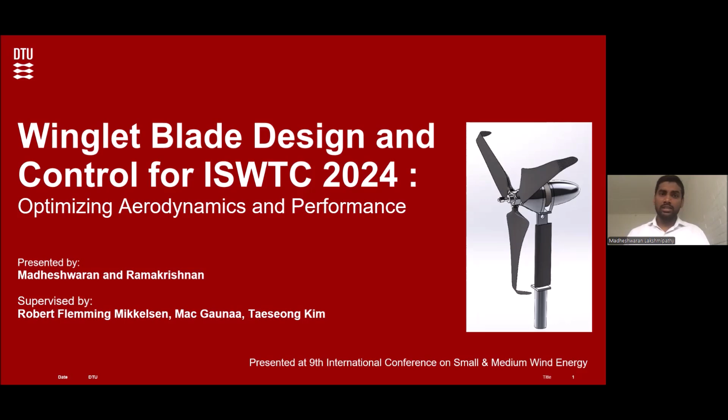Hi everyone. We are here to demonstrate our research, which was focused on winglet blade design and control for ISWTC, the International Small Wind Turbine Competition, which occurred this year, focusing on optimizing aerodynamics and performance. We are two students representing the whole team of eight students. This is also a course and a club, supervised by Supervisor Robert, Taeseong, and Mac.

In this course we focus on two different competitions: the International Small Wind Turbine Competition and Racing Aeolus. Racing Aeolus is about capturing wind and using a wind car for driving. Both competitions occur in the Netherlands. This is our team, with the winglet hub and high winglet profile, demonstrated at TU Delft.

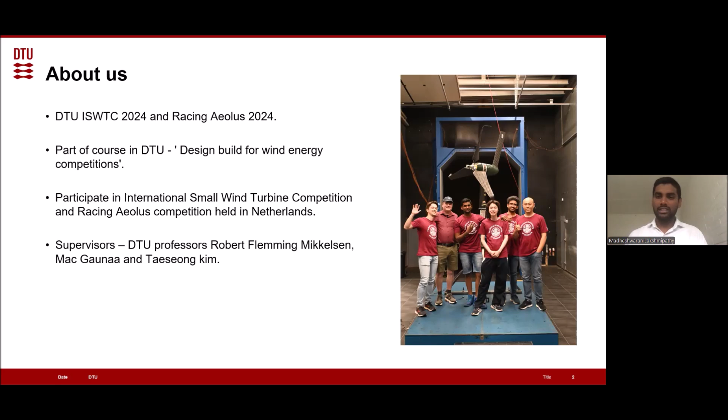Getting into ISWTC, it's a student competition where we have to design, model, and build our own wind turbine, including the control part and every aspect of it. Our main goal is to test it in the TU Delft wind tunnel, conducted by Hanze University of Applied Sciences, where we presented.

We got a good result this year. We won with the lowest cut-in wind speed of 2.5 meters per second, with the highest electrical CP of 0.408, and the highest AEP, as you can notice.

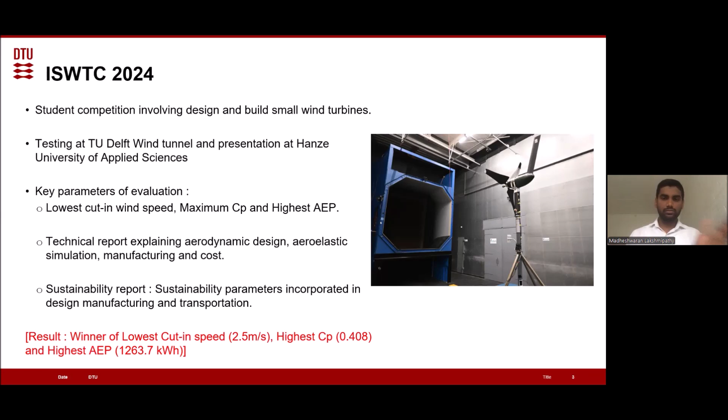I'd like to talk about the new changes we made for ISWTC 2024. First, we modeled a winglet blade with an 80-degree downward winglet, which is almost 20% of the blade span. The reason is that the rotor area is limited to 2 square meters, so we have a boundary condition and cannot overcome it to increase CP. So we went with the winglet design.

Other parameters we implemented this year include active pitch control with RPM and pitch sensing, wireless wind measurements for automatic calibration, and we used a BEM approach for aeroelastic simulation of the winglet blades.

For designing the winglet blade, we used a lifting line framework, because we found the BEM framework was not compatible—it failed to do the design for non-planar rotors with radial effects, which was difficult to handle in BEM. So we used a lifting line framework instead.

The inputs for the first part of the design were the lifting line geometry, the circulation, the tip speed ratio, and the CL by CD ratio. The outputs we obtained were solved iteratively, solving for the highest CP to increase the CP.

The outputs from the first part were the loading along the blade span, the induced velocities, wake geometry, and the power coefficient CP. So for the second part of the design, we gave additional inputs, such as fixing an aerofoil profile.

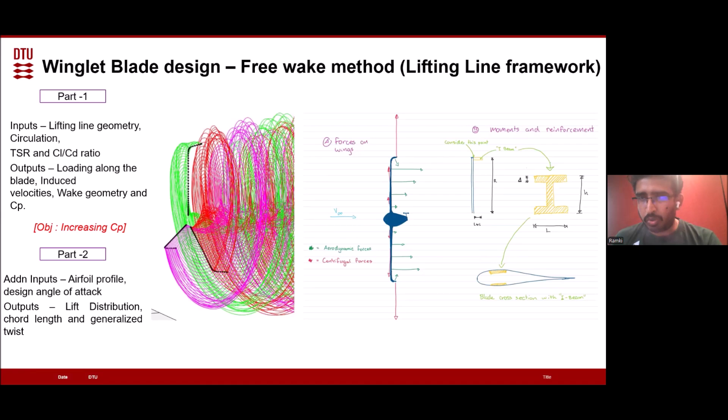For the aeroelastic simulation, there is no present tool that can do lifting line framework simulation for aeroelastic analysis, so that wasn't possible for us. We used a BEM framework tool, HAWC2, for the analysis. Our main assumptions were that the flow was steady, and the tower and blades were kept stiff.

The wind speeds we analyzed were around 4 to 10 meters per second, which is what we generally use in our wind tunnel testing, so we kept it up to 10 meters per second.

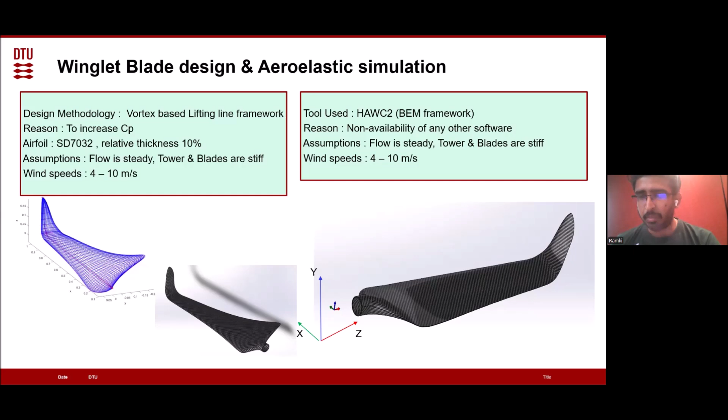From the aeroelastic simulation in HAWC2, the main results were the radial loads, which are seen predominantly only in the winglet blade due to centrifugal forces acting on the winglet. The tangential load, seen here at the end, is opposite in direction on the winglet compared to the main part of the blade.

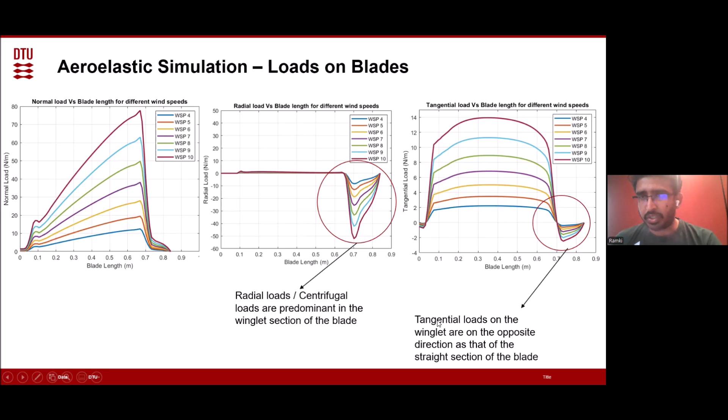This is actually quite a decent result, because we weren't sure whether the BEM framework could handle the centrifugal loads and even the opposing tangential loads in the winglet design.

The next part I want to discuss is winglet manufacture. We used carbon fiber because it has a high strength-to-weight ratio, and we used epoxy resin as the binding material.

From our winglet design, we have two molds, which are the negative molds of the pressure side and the suction side. The different carbon fiber textures we used were unidirectional, and also a 45-degree texture for torsional stiffness and for blade root reinforcement.

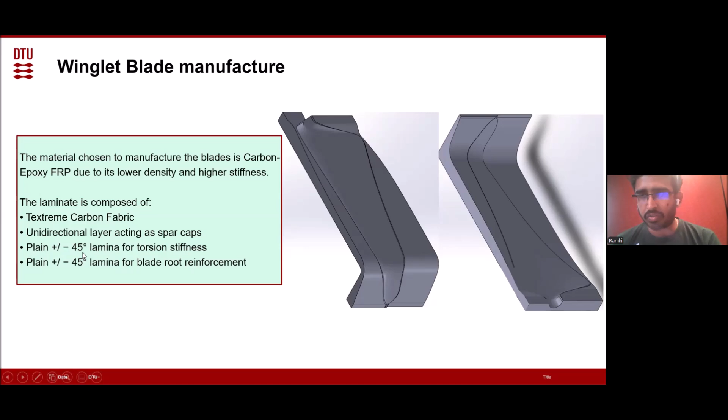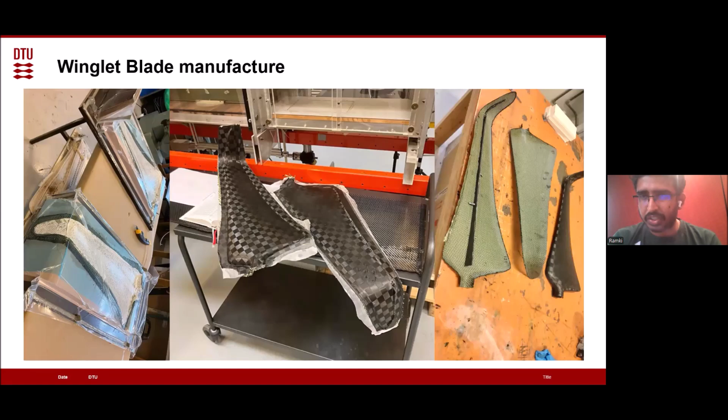I wanted to show some pictures of how we did the winglet manufacture. This is the winglet right after it comes out of the mold from the vacuum section. We get this mold, cut it, and use reinforcements like webs and shear webs along the blade span. Then we stick together the positive and negative sides of the pressure side and suction side using structural epoxy.

The next part of the analysis was sustainability, because we need to see how the small wind turbines we're producing can contribute to society. We took a case in Kapoeta, South Sudan, which is one of the places in the world with the lowest electrification rate.

We assumed a small wind turbine could purify water to provide fresh water to the occupants there, considering around 10,000 occupants with a requirement of 7 liters per day per person. So the total requirement for purified water was around 70,000 liters.

We calculated this using the lifting line framework. The mechanical design CP was around 0.408 for the non-winglet rotor and around 0.4518 for the winglet rotor, which is almost an 11% increase in CP.

The energy produced from the small wind turbine for a winglet rotor was around 3 kilowatt-hours per day, while the energy required to purify the water was close to 14 kilowatt-hours per day. So the number of small wind turbines required is around 5, but this can save carbon emissions of almost 7 tons throughout the lifespan of the small wind turbine.

So this is the computation we did, showing the sustainability of the small wind turbine. Moving on to the next part.

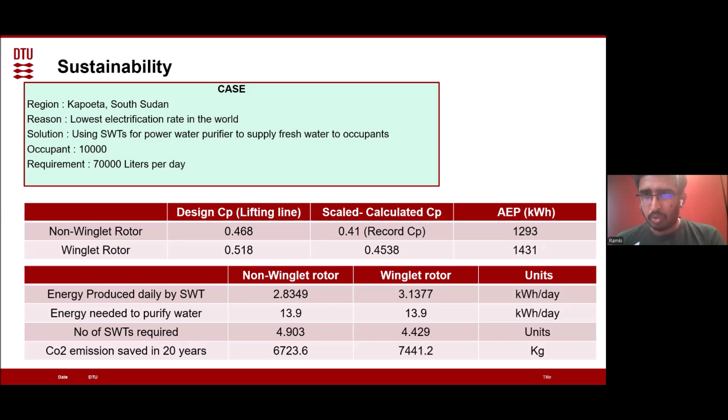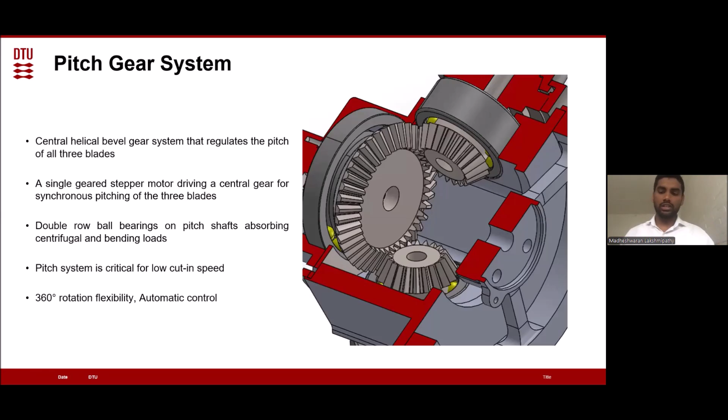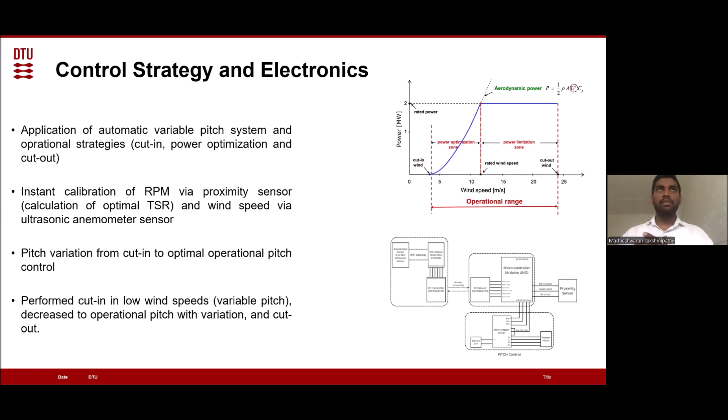With the help of the proximity sensor, we were able to get instant RPM measurements. So without any torque control, we were measuring the RPM and getting the torque accordingly. We were able to find the optimum pitch angle to increase performance while maintaining the tip speed ratio lambda. This way we were able to immediately go from cut-in wind speed to increase lift, and immediately change to the operation range in pitching. We also had aerodynamic brakes for the cutout, so we were confident about that.

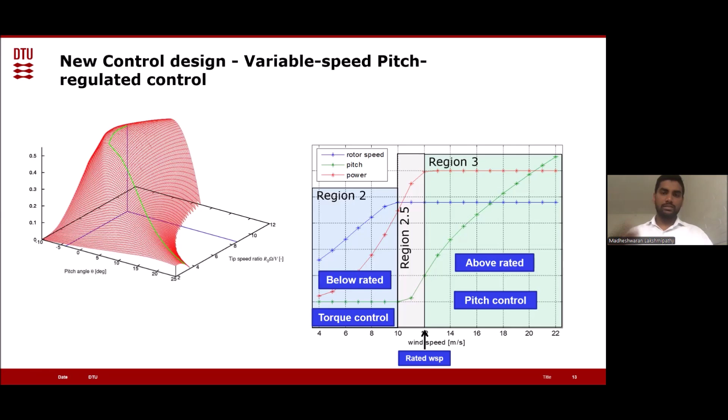In region 3, the limitation zone, it's a pitch control, where for each wind speed and requirement we can demonstrate that. This is the generator, a radial flux generator which is completely in-house manufactured. We are currently using low resistance for the torque control, but we are trying to make an extension system for control of the turbine as well.

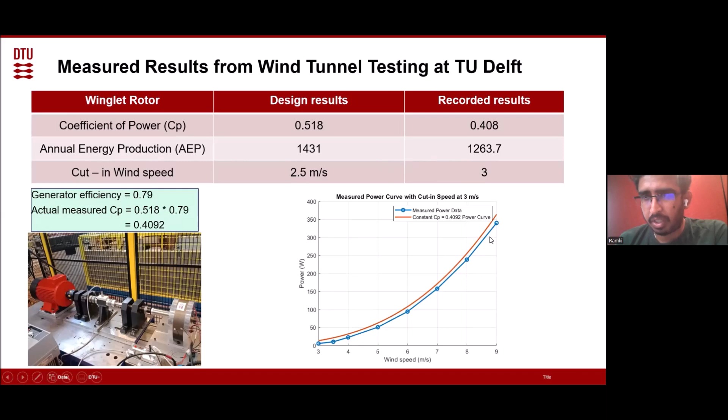We just wanted to show a small video of our... okay, I think audio is not visible. Audio is not here, I'm not sure. Okay, I think there is. We can just see how to do the pitching, and then we just see the working of it. Sorry, just play that. Yeah, sorry.

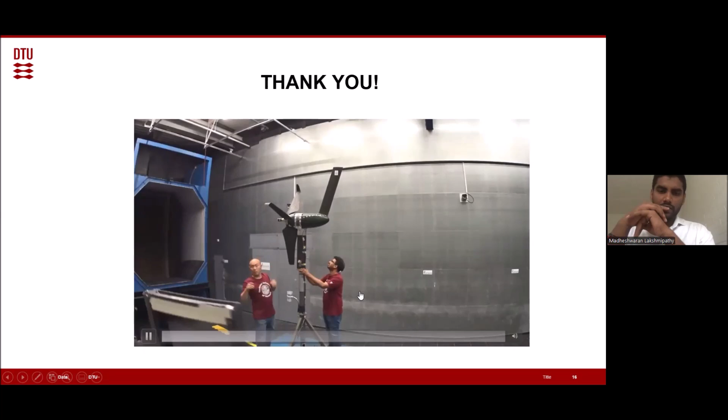This is Taeseong, our professor.

This was just running at full speed, and then we used the aerodynamic brake to pitch out the blades to bring it to a stop. That's what we did here.

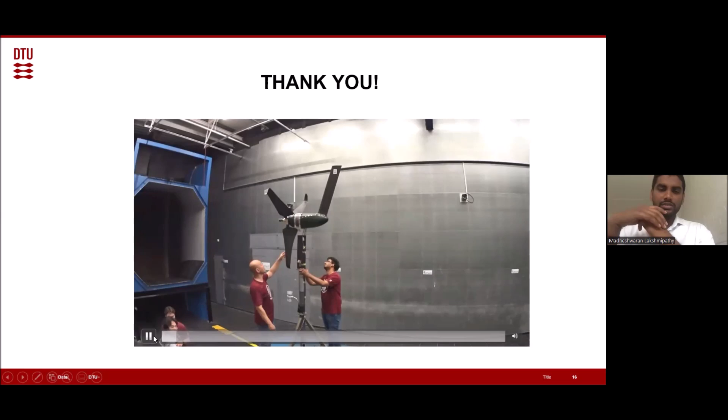Okay, I think it stopped. I don't know, okay, I'm sorry. I think there is something wrong with the video. Yeah, sorry. Yeah, thank you. That's it.